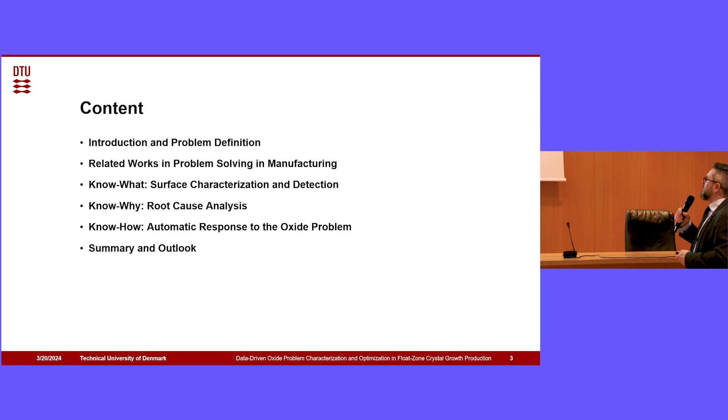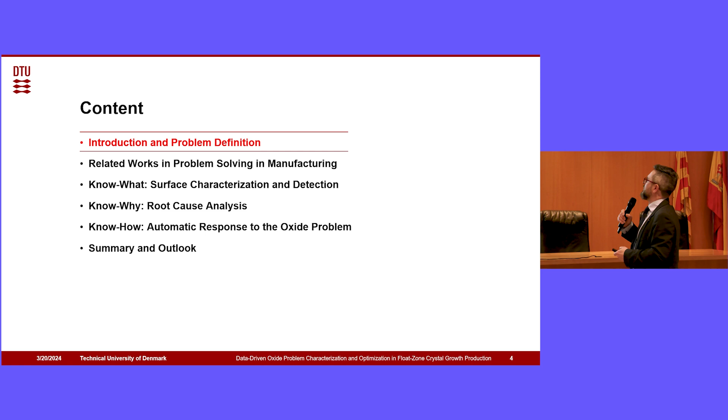So the short lecture is about her project, which is developing problem solving in manufacturing. There are some methods, but she found one really good way to solve the problem. The problem is about the presence of oxidation in silicon production. And I will explain now what we mean by that.

So that's basically the revenue in billions, in this case dollars, in semiconductors. You see since the beginning, this is the 80s, this has been growing all in all. Semiconductors are basically made of silicon, and that's what is moving everything in the world - your phone, your computer, satellites, everything, trains, planes. And needless to say, all the digitalization goes through the use of microchips. So for this, we need a lot of silicon.

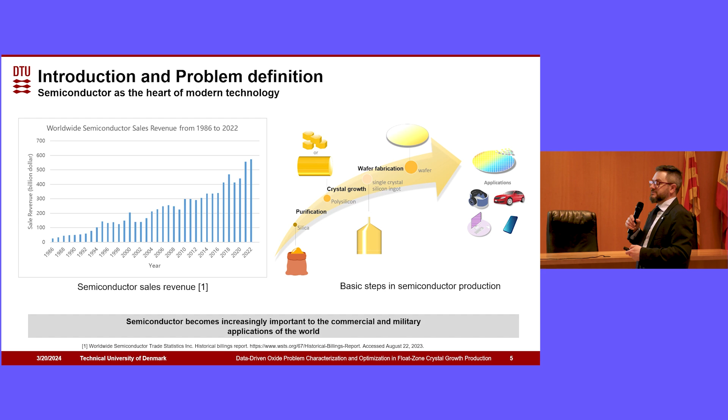So this company, the one collaborating in this project, is in this business. We can do microchips for everything because we can make silicon wafers, and these are made of silicon. So we need to make silicon as a material - it's not mined, it's made. And it has to be of ultra high purity for everything that is moving, anything you see in the world, from machines, pacemakers, hospitals, you name it. Everything is based on microchips nowadays. So having problems with this production is in fact a problem that has to be solved.

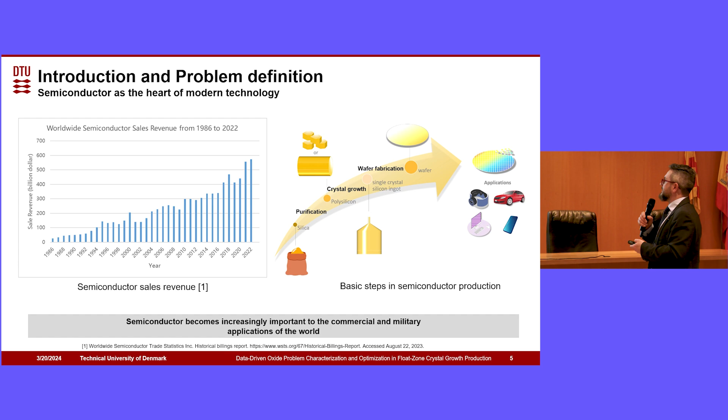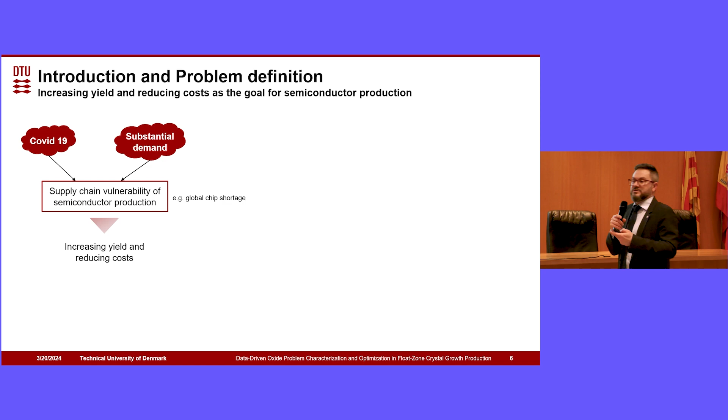We have seen during COVID there was really a lack of electronic material because the supply chains were very long. We were using them in Europe, but they were ordered from China, Taiwan, for example. Then borders closed down and we ran out. Cars could not be delivered - for a moment, cars could be ordered today, but delivered in 2-3 years. No more sensors.

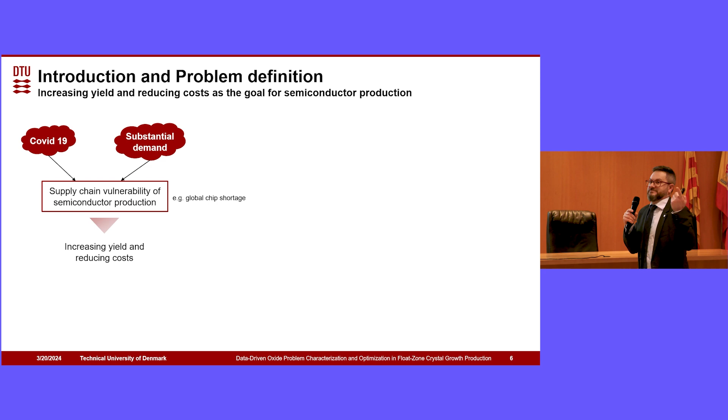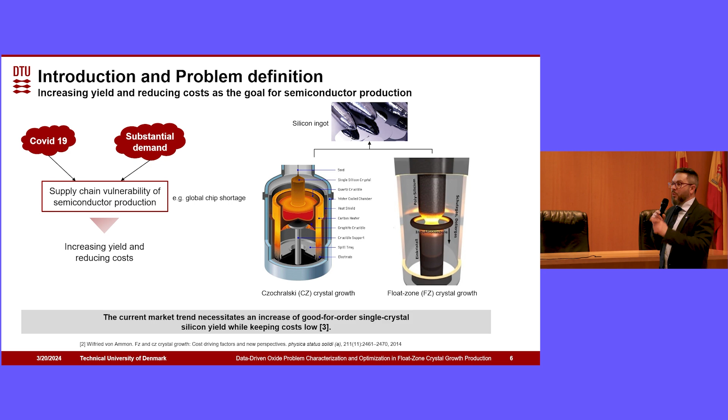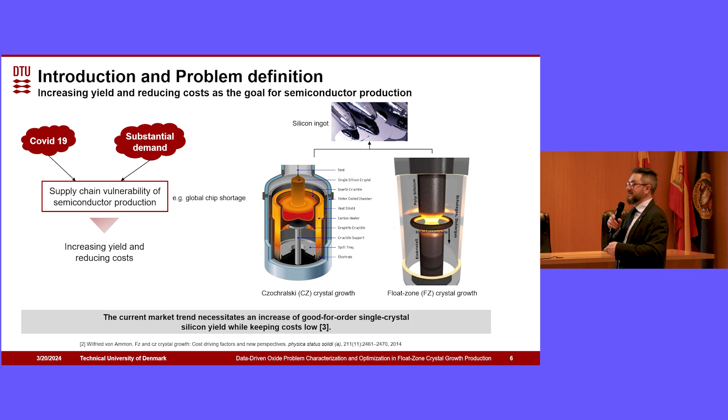Now imagine, in order to make this, and then it's sliced in wafers, it takes maybe 40-50 hours. And if there is a defect after 50 hours, so 2 days of deposition, you cannot use it and you cannot sell it. One of these will cost 50,000 euros, and it is a problem. Half at the time of the project is actually not sold because it has a defect. So the idea is, can we improve the process in a way that there are no defects, so we can save a lot of material, energy? Question mark. And the project was about that in essence.

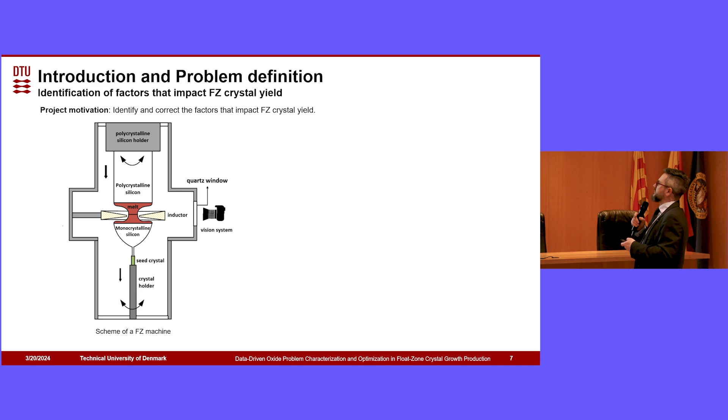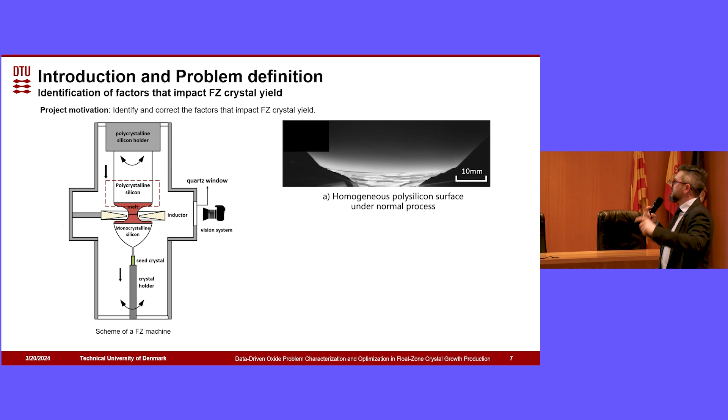So that's a schematic of the machine. This is a very good silicon material when it's melted and becomes this ingot, as it's called, of silicon. And that's a trace on the surface of silicon when the process is going out of specifications. So most probably this process will produce an ingot that cannot be sold, because when there is an impurity, then the wafer will be defective and then no microchip can be made. So the question is, how can we find this?

This takes 50 hours to make, and there is a camera watching through a thick quartz window. You need to find this picture within a video of 50 hours. This cannot be done by any operator staying there day and night just watching. It's impossible. The company was making the videos, accumulating data, but not analyzing it. They were only discovering at the end, with quality control, that the product is defective.

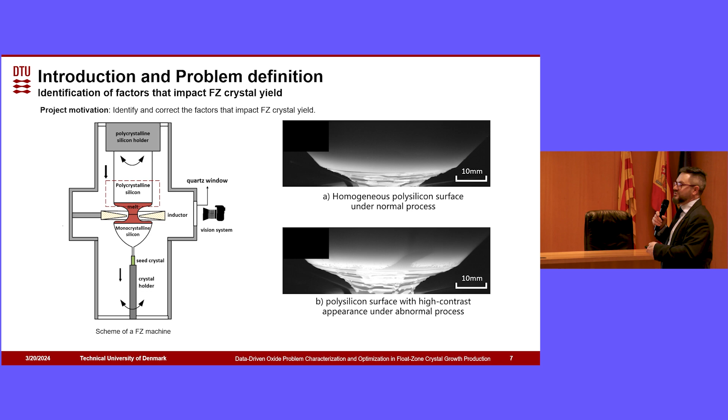So what Tingting made was a piece of algorithm that could load a video, look through all the pictures—because basically a video is a sequence of pictures every X seconds—and find the defect as soon as possible. That was the first objective.

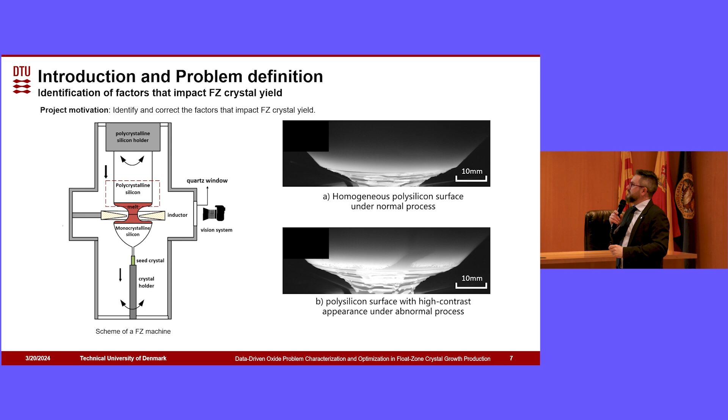Once we learn in which conditions we find the defect, the idea is to predict that there will be a defect, so we stop even before. And once we have learned that, the third objective was reached: to set up the process so that it's not going to produce any defect.

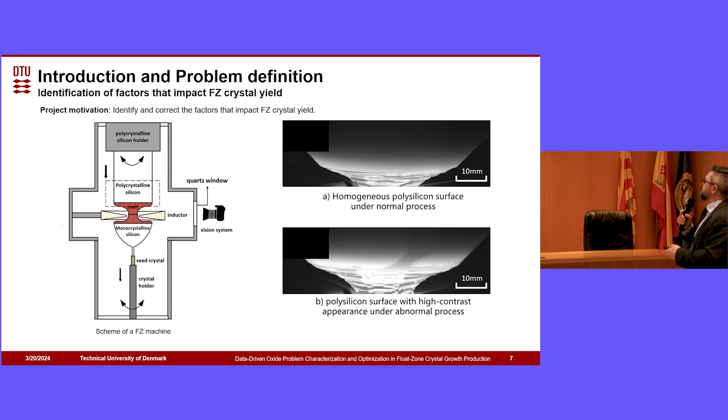So I'm going to show you a bit part of the solution in the few minutes I have today. But in essence, this is what happens, okay?

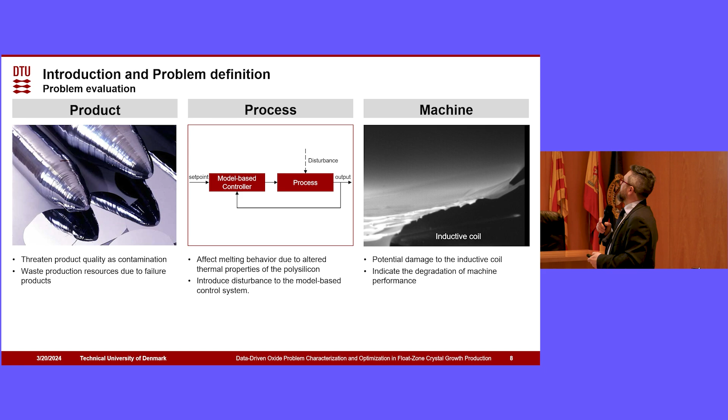So this is the product, it's called the ingot. Then we have the process. Some random disturbance will happen—at that time, we did not know exactly what it was. And then in the machine, we observe this. These are the three objectives that I have mentioned to you, so let's go on.

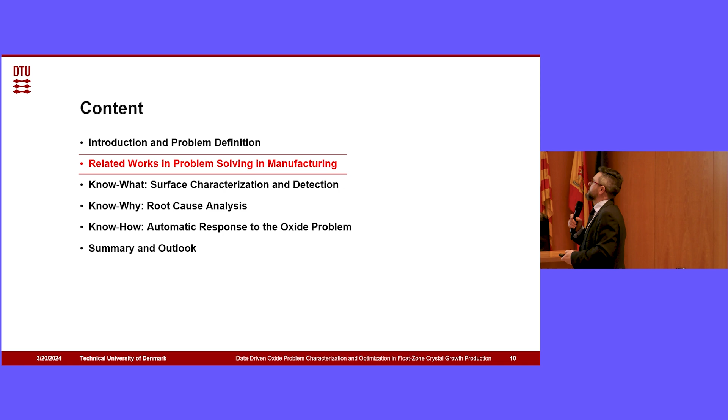So let's see how we can solve this problem. Historically, in manufacturing, even advanced manufacturing which we have data for, the solution is based on a lot of specific knowledge, it's called.

But now machines are becoming more complex. They are gathering more data, and in principle you need more and more knowledge to do that. So the idea is to use a data-driven approach in which we find correlations by algorithms.

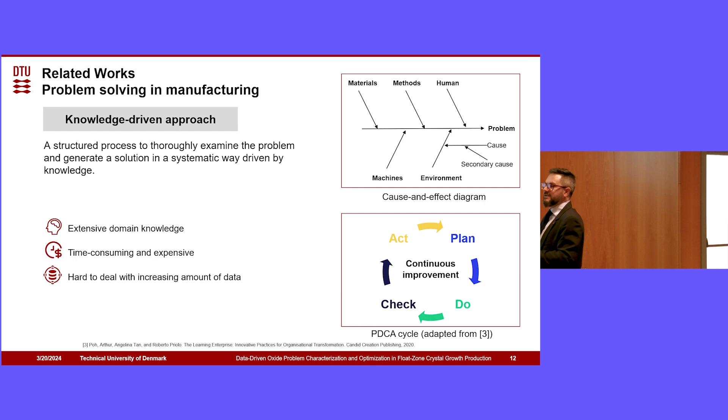That can be automated and done faster, because just using knowledge, you need a lot of human knowledge—it's time-consuming, it's expensive, and when the amount of data increases, it's just too complex. You will not find that person so expert that can solve that problem, all right?

Data-driven approach is essentially what we call artificial intelligence today. And the tools are deep learning and neural networks. We have seen that machine learning using just neural networks was too small, so the problems it can solve are actually relatively small. What we need to use is deep learning, which are basically neural networks with a lot of layers.

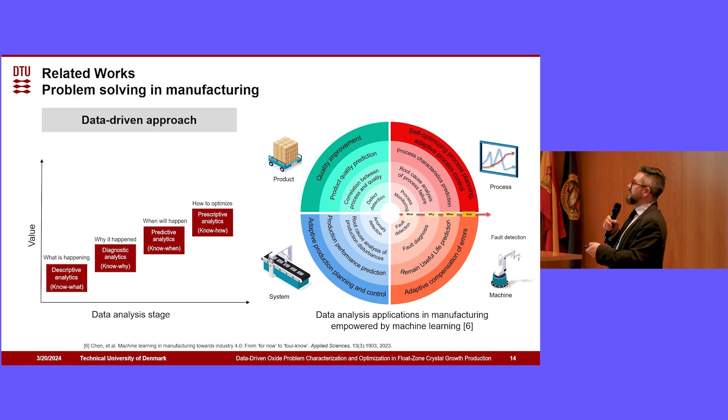So if we do this, we can describe what happens, we can make a diagnostic, so we know why something has happened. And if we have a good explanation of why, we can calculate when it's going to happen—that's the predictive analytics. And when we know this, we can implement the algorithm, and then we can optimize.

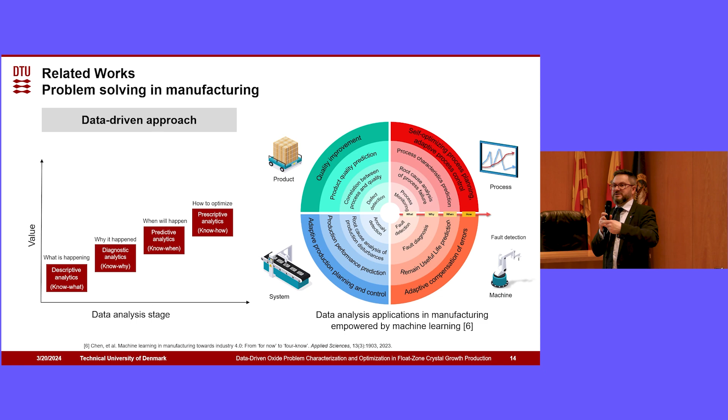Now these calculations, that's the good news, are basically all based on linear algebra, so they are very fast. Doing all this takes time, but once the algorithm is calibrated, it's super fast. So if the machine is working, we can know in real time if it's going to be good or not. That's basically one of the big powers of artificial intelligence—how fast it is, okay?

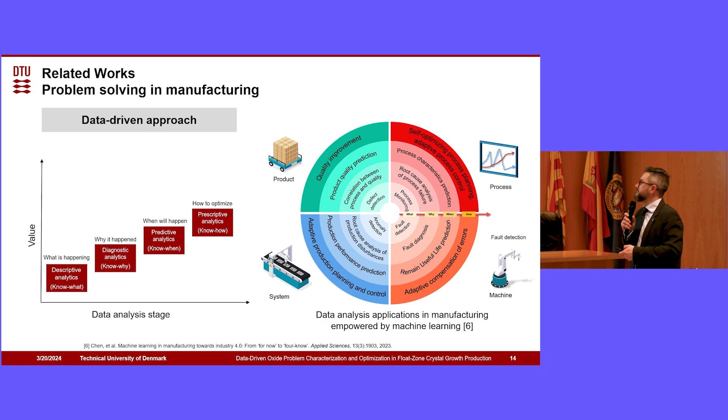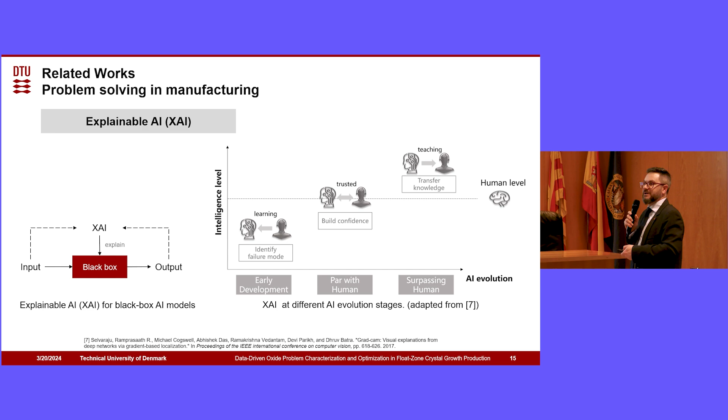More problems: everyone is using AI today, but essentially you don't know what the algorithm is doing, and this is more true for very big systems. That's the black box. This may be fine when your phone is just checking whether it's you with face recognition, but it's not good when you're operating a 100-million-euro asset. You really need to know what's going on. You cannot trust AI to manage an entire factory—it's not safe, and it's not secure.

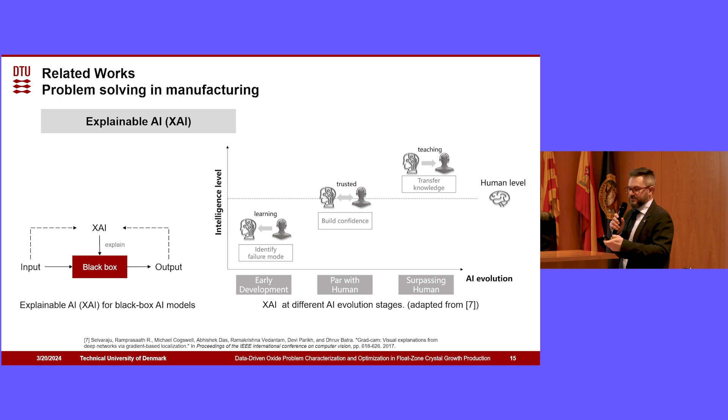So the layer we are introducing to do problem solving in manufacturing with AI is called explainable AI. We put a component of physical understanding in the algorithm, and this is what Tingting has done. That's basically the structure of her project.

So there has been some physical characterization—I'll show you some pictures—and then the understanding of why oxidation happens, and then the understanding and coding of that through artificial intelligence. So, now, this is the physical characterization.

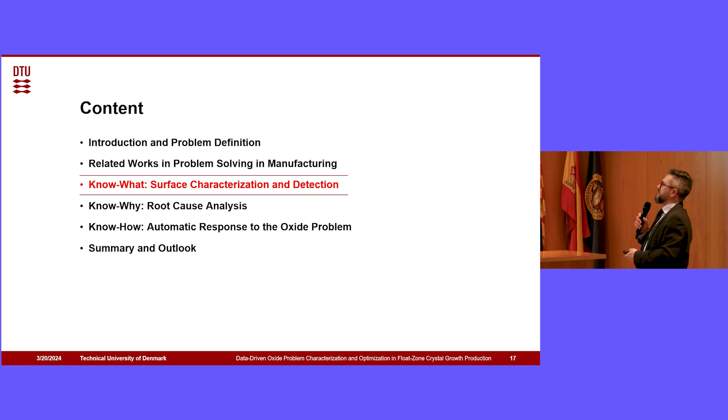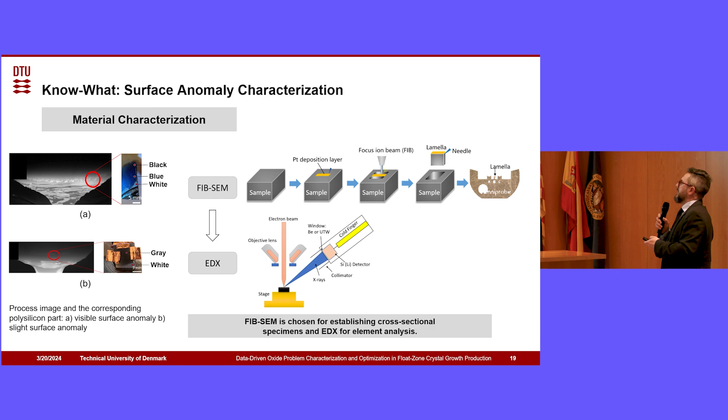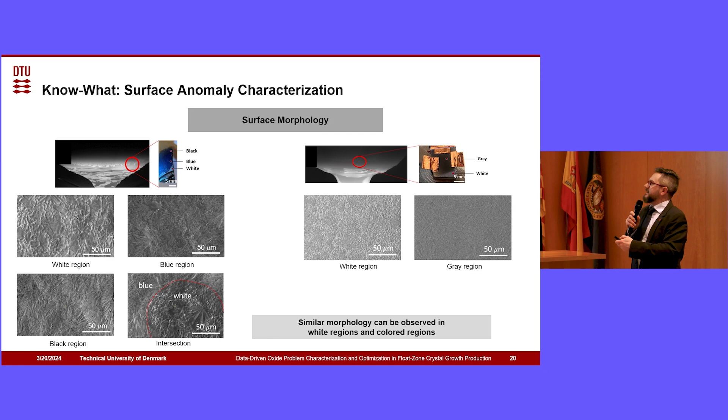And that composition has to be analyzed. These are images of the surface. It turns out we can clearly see different colors, but the structure of the surface is the same, so there isn't really valuable information here. We needed to go deeper, and that was done by cutting slices of the material, and we finally found some layers formed on the surface.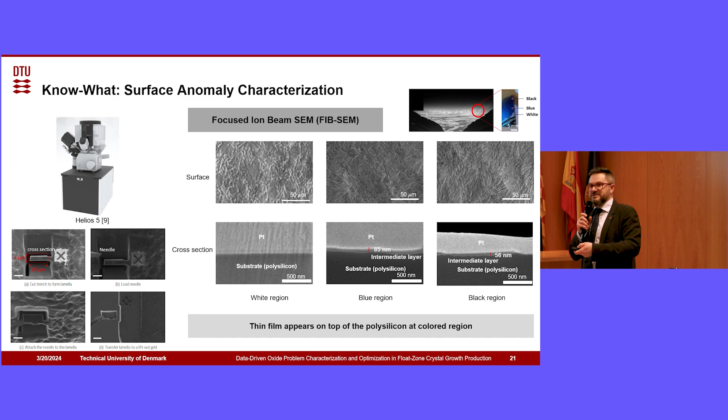You see when it's white, there is a very thin layer here, and when it's blue, it's thicker, and when it's black, it's intermediate. If you look at the scale, we are in the tens of nanometers. That difference is very small. Unless you do this kind of analysis, you won't find the key reason why we see different colors.

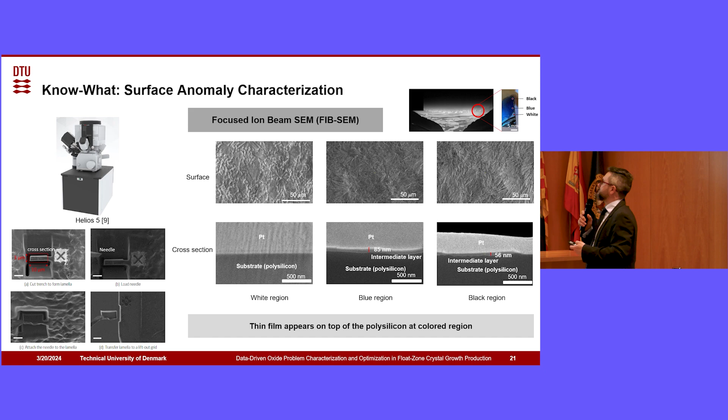Now you may ask, well, what's with these colors? Is it really a problem? The color itself is not a problem, but it's the sign that the composition has changed, and this is what's resulting from this chemical physical investigation.

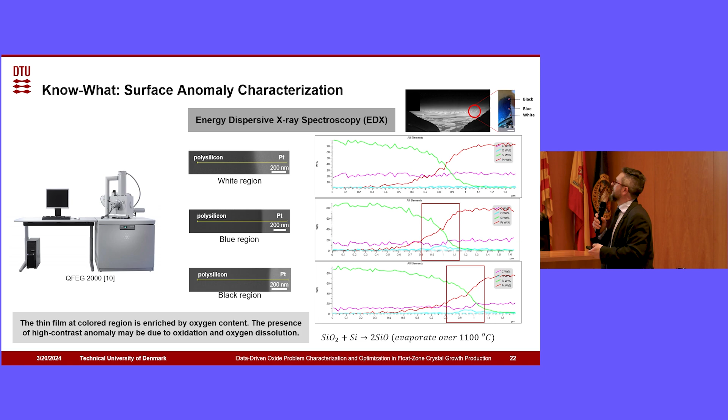By the decomposition of this silicon dioxide at very high temperature, we have silicon monoxide, and that oxide is proven to be the origin of the defect. Now we need to build the bridge between the physical analysis and the image analysis, because we cannot do this all the time—that takes a very long time.

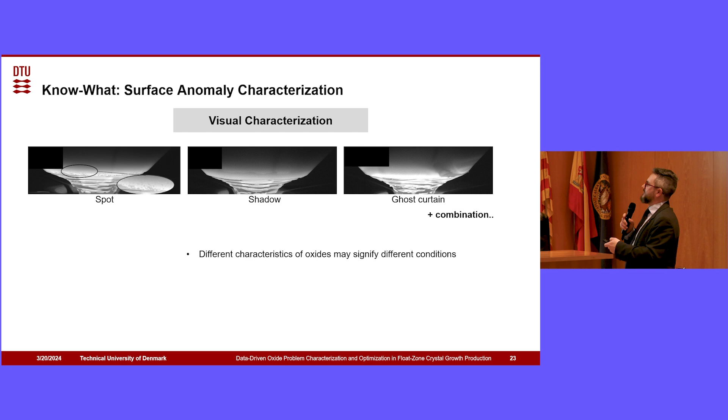But at least we found out why the defect starts in the first place. Because with the different colors, we found the different defects on the surface. And from there, we can go on with the image analysis. In very short, this is how it is done.

We load the video, we train it with a database of images, and then we can recreate that image to see whether the algorithm, which is now digitally recreated, is able to recreate reality. If you do that many, many times, it gets better all the time. It's the process of training, learning, and then validating.

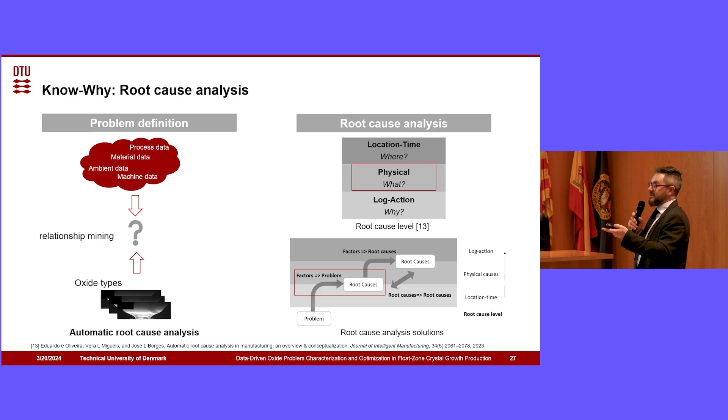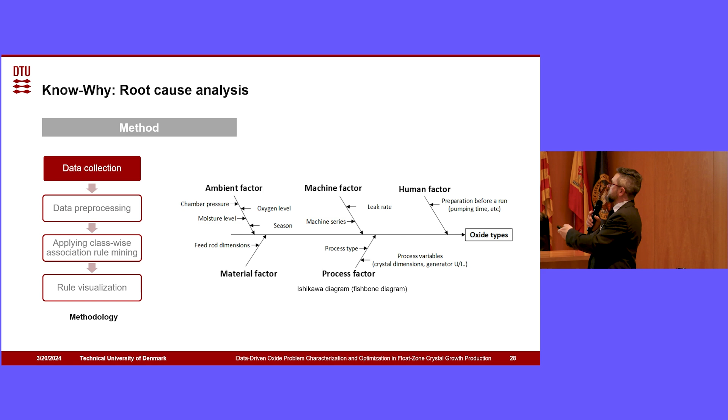So here we have root cause analysis, meaning we want to be sure that everything that can lead to that mistake is taken into account. And for that, there is a specific workflow: you analyze, this is very well known in manufacturing, all the sources of errors, you classify them, and then you look for trends.

So here we have our data space, and here we have our types of oxides, and we want to build that bridge in a reliable way. When we are able to do that, then we have explained how the algorithm works, and this is done in this way.

So we can apply, in this case, any model—at the end, it's data. And then specifically to our case, we have a way to verify that.

It can be improved, but it's only a matter of time. The more data, good data you give to the model, the better the prediction will be. But this is the level that's been reached.

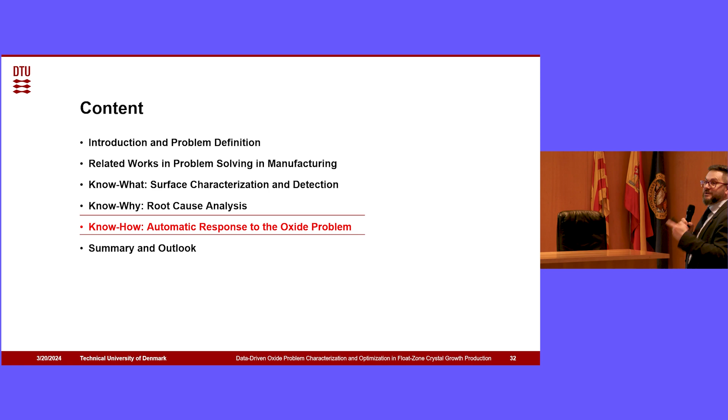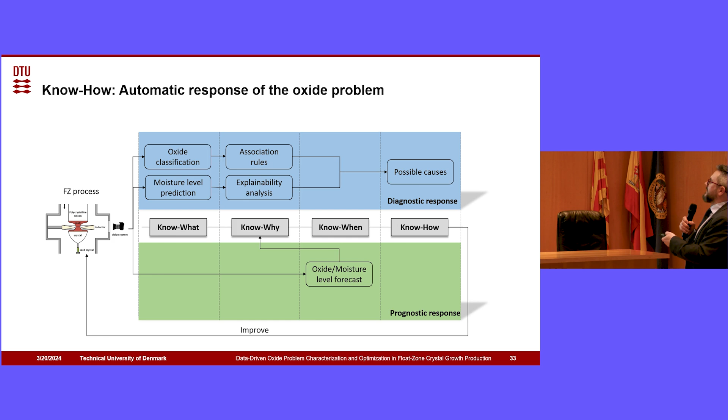Now that we have an algorithm that can predict that, this is the idea: there is a camera watching the process, and then the algorithm is analyzing in real time the video, and it can tell you whether the process will fail. So you can stop after one hour—no need to go on. There has been already oxidation, so you don't need to wait 50 hours.

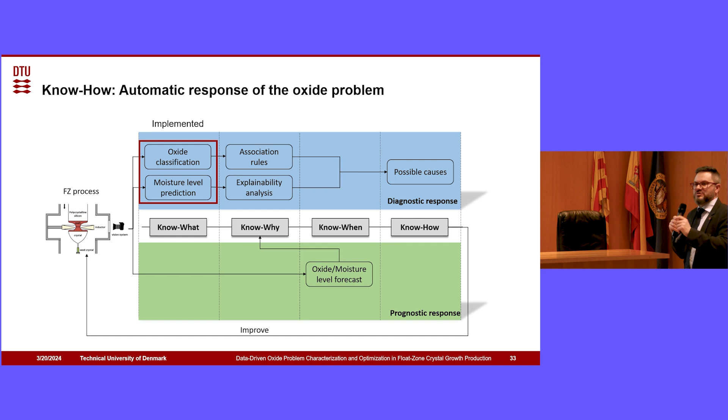So in summary, basically those three ideas have been formulated and then implemented: a clear understanding of why defects happen, creating that correlation between the cause, which was related to moisture presence, and having an algorithm that can detect that through video images. And because, as I said, these models are very fast, now it can be done in real time.